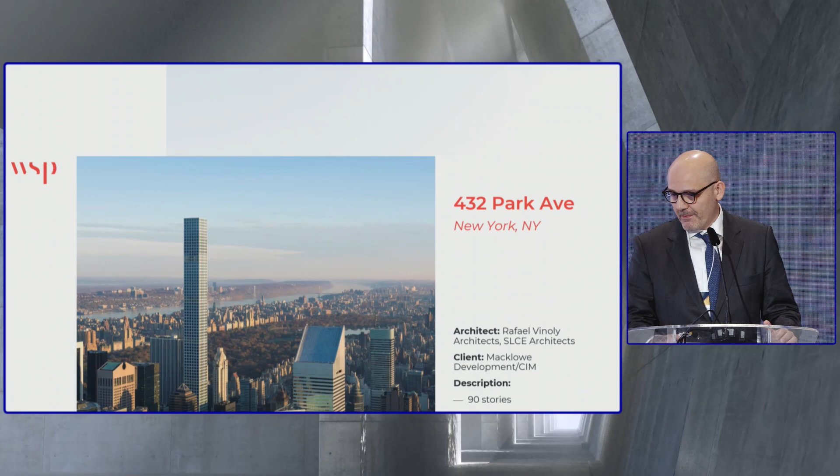So we have a lot of residential and commercial buildings. Starting with the New York area, we are the structural engineers of 432 Park. 432 Park is Rafael Viñoly's building. The architect is Rafael Viñoly. Our client, the developer, is Macklowe Development. It's a 90-story, roughly 425-meter tall building.

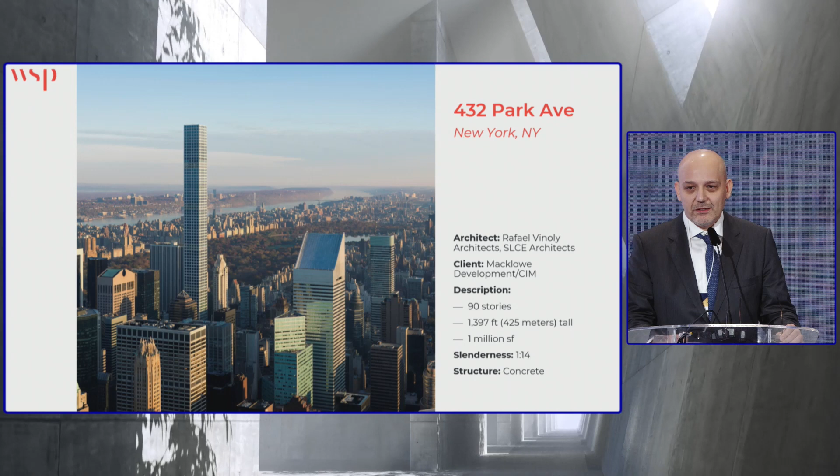An important thing is the slenderness ratio, which is 1:14. Another project of ours is Beekman Tower, Frank Gehry's building - I think Frank Gehry's only tall tower so far. It's a 1:10 slenderness ratio with a 265 meter height.

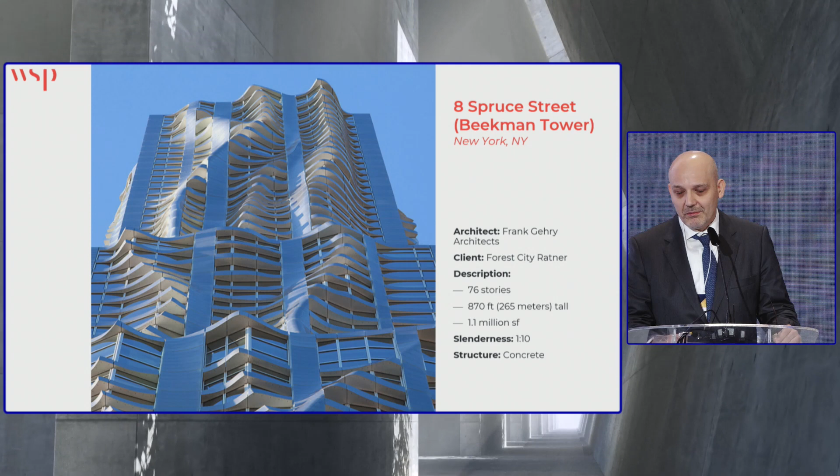Then we come to 157 West 57th building. This is the first building that we have worked on in the 57th Street line, also known as Billionaires Row. This is one street below Central Park South, so this row has a lot of tall buildings facing Central Park, which is a premium area. 157 West 57 is 75 stories and 1,000 feet, roughly 300 meters tall, and it's the first installment of the Billionaires Row buildings.

Another prominent building by Columbus Circle is the Time Warner Center. I wanted to show you this because this building still has concrete stems. It is a mall, a hotel, and also has residential floors, so there are 4 different uses of the building. It's 230 meters tall and was completed around 2002.

Another of our buildings, the latest installment in the 57th Street line, is 111 West 57th Street. It's 434 meters tall, and as of today it's the tallest, most slender building in the world. It's finished, it's occupied - people have been living there for a while now. This is the latest installment we've had a chance to finish on 57th Street.

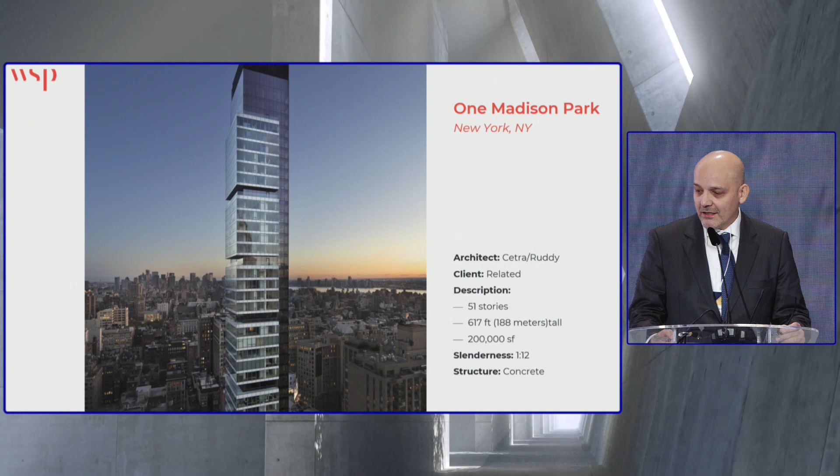We have another building I would like to show. This is the first real slender building that we have worked on. It's One Madison Park. It's been in use close to 15 years now. Our client is Related and the architect is Cetra/Ruddy. It's 190 meters tall.

One of our buildings is the product - this is finally finished, it's 217 West 57th Street. As of today it's the tallest residential tower in the Western Hemisphere. They've started selling apartments, and the triplex is for sale for $250 million. So it's a very successful project, and we're very happy and proud of working on it.

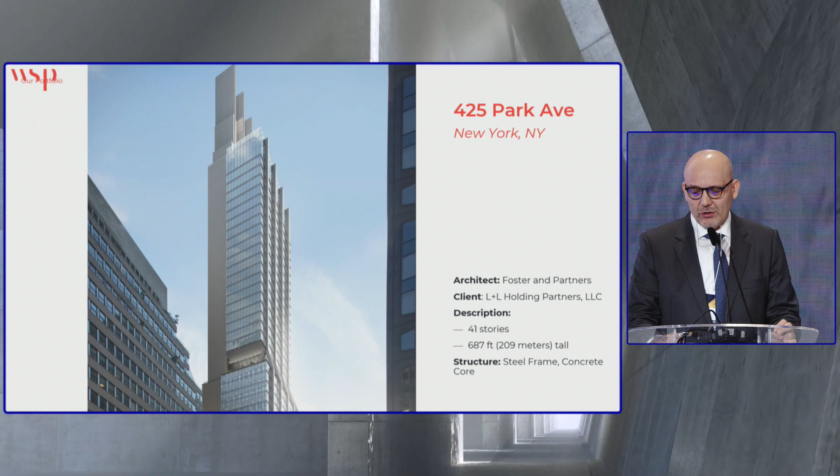This is the last one I want to show you: 425 Park Avenue. This is an office tower, recently finished a year ago. It's Norman Foster's latest office building.

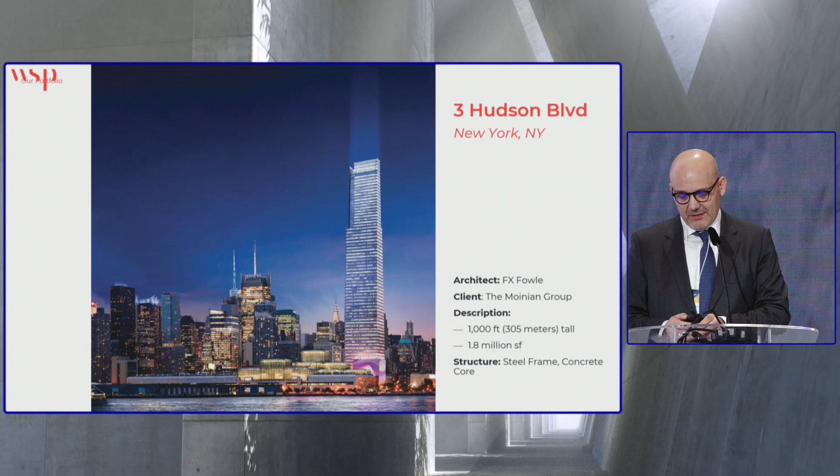This is 3 Hudson, one of the buildings we engineered in the Hudson Yards complex. Basically, this building sits on a train yard, a train parking yard. We have 8 buildings there right now, as of today, and all these buildings sit on the train yard, so there's a platform. We engineer the platform, and we engineer the buildings above them. This building is starting soon, but the rest of the buildings are already in place.

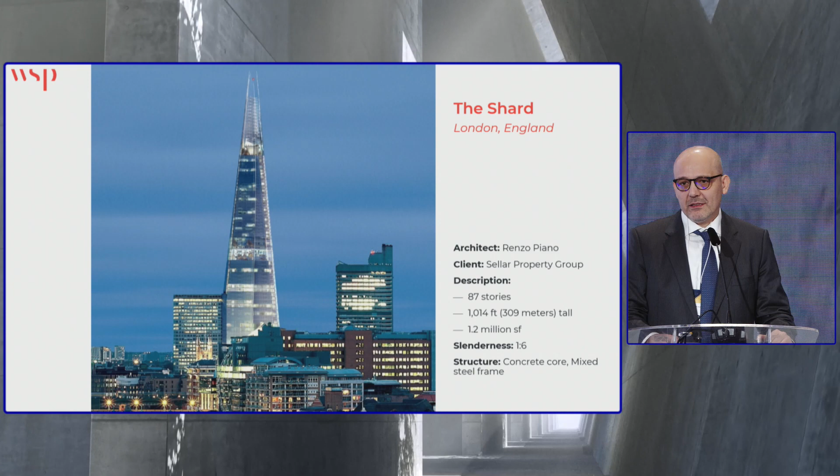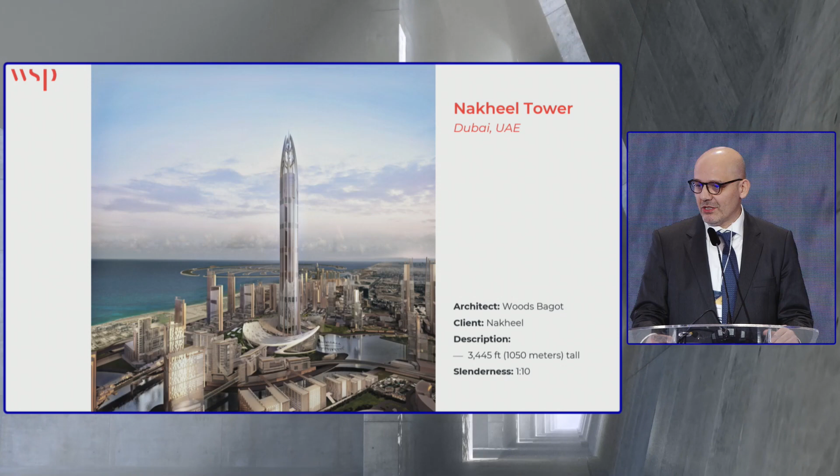So we also engineer high-rise buildings internationally. Shard is one of them. I'll pass through these buildings a little bit faster. We also engineered Nakheel Tower. Some of the projects, although they're engineered and have some level of structure in it, only have a foundation in place, like the one I will show in India.

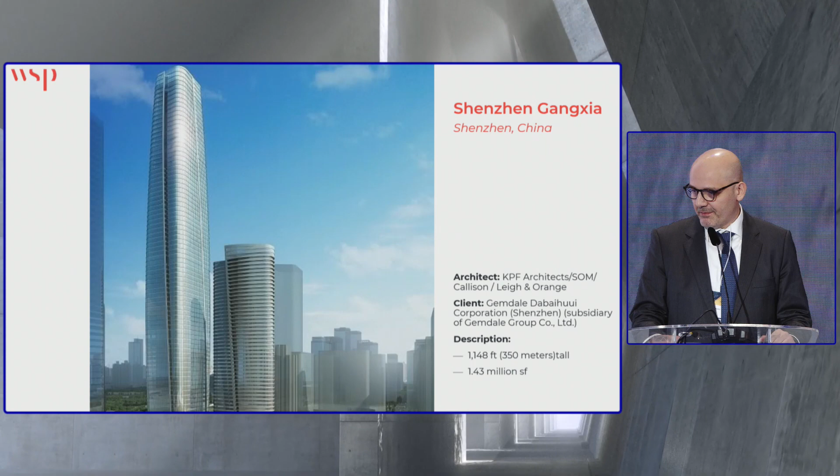So we also have a few buildings in China. This is a building that we extensively engineered for a number of years, and only the foundation level has been built. This is under construction right now.

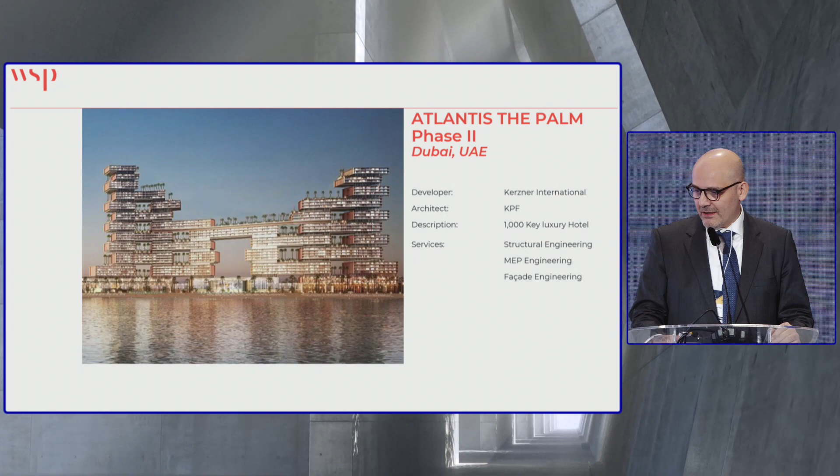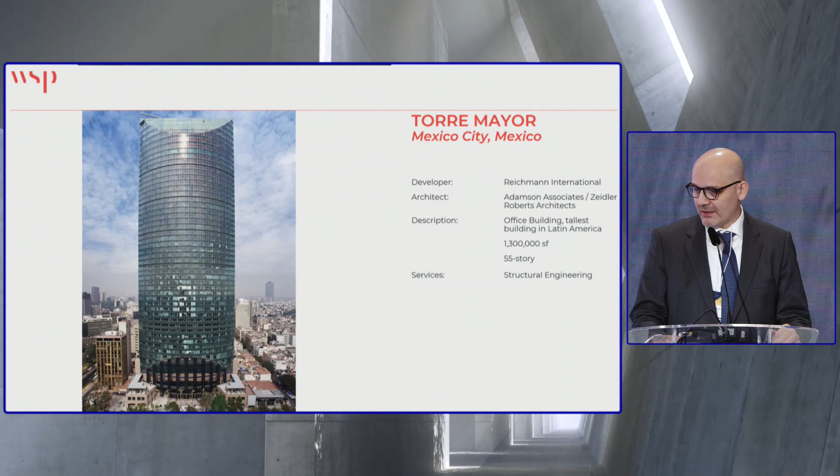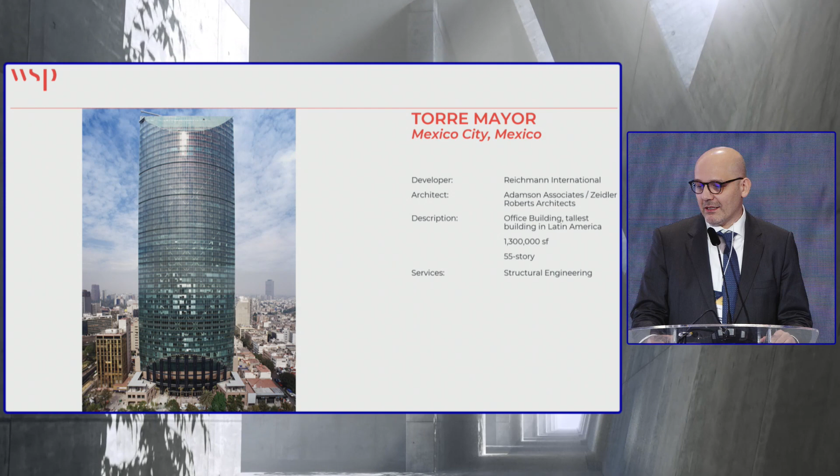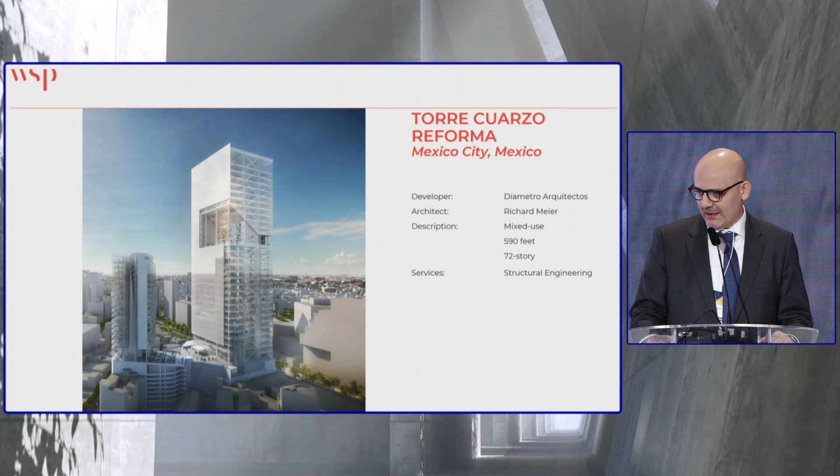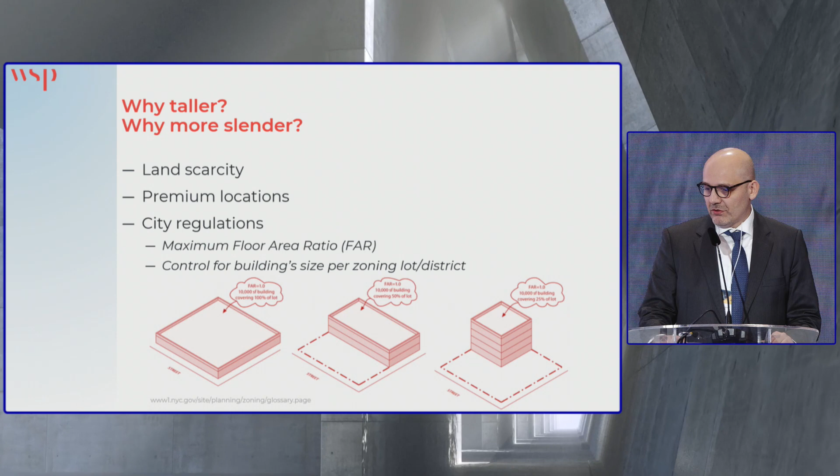So why taller, why more slender? The biggest thing is land scarcity. The location of these projects are mostly in premium locations, and some city regulations with zoning don't allow you to build more than a certain floor. Although there are some restrictions, in places like New York you can buy your neighbor's air rights, meaning you can buy your neighbor's right to build height, combine them, and add it to your building.

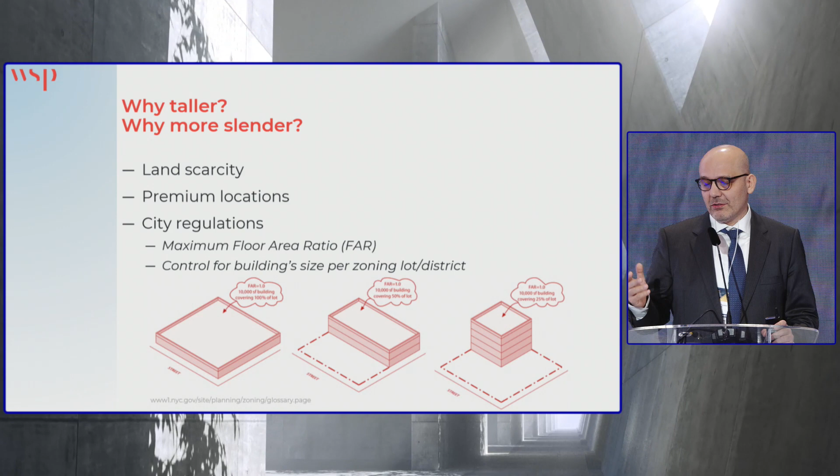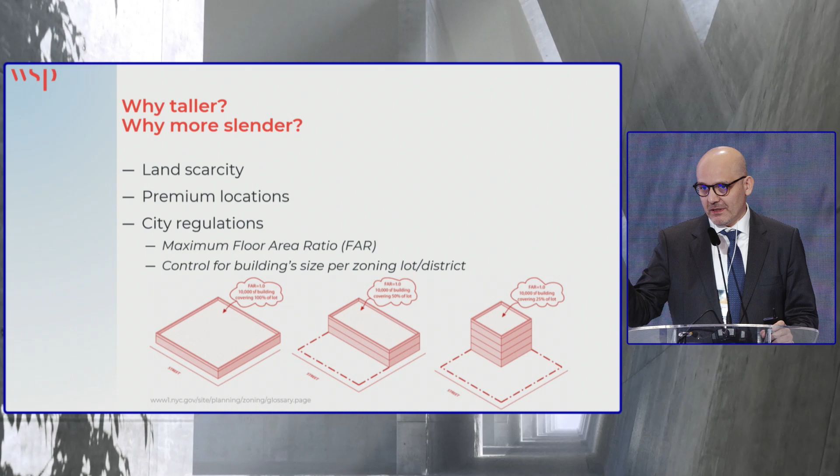Majority of these buildings are built that way, and this results in cantilever buildings like 217 West 57th Street, which means they bought the air rights of the next building so they can cantilever on top of it. The cantilever is almost 30 feet, or 10 meters. A cantilever for a tall building is a significant number.

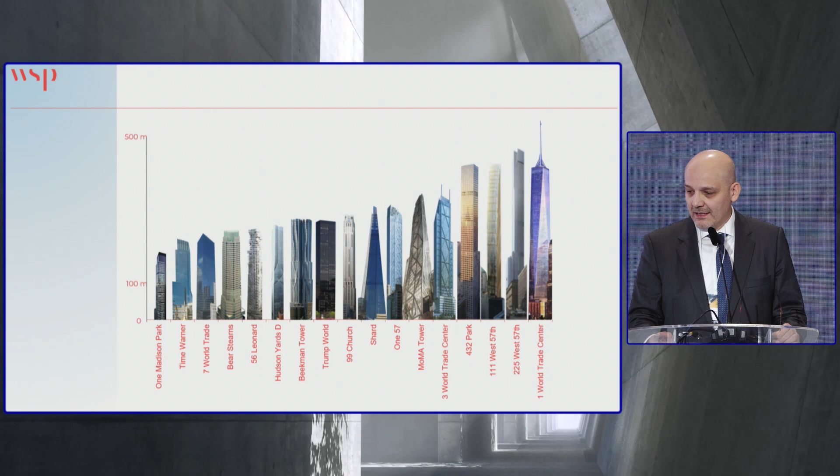So what is slenderness ratio? This is a very important topic. There are codes and documents that define this. Like in New York City, the slenderness ratio of the building is defined by 1 to 7. If the slenderness ratio in each direction is more than 1 to 7, the code requires you to take additional steps with the engineering, and it also has some mechanical requirements. So what we understand today is, since we have a lot of buildings that are very slender, we generally call a building around 1 to 10 slenderness a slender building, and super slender is larger than 1 to 12.

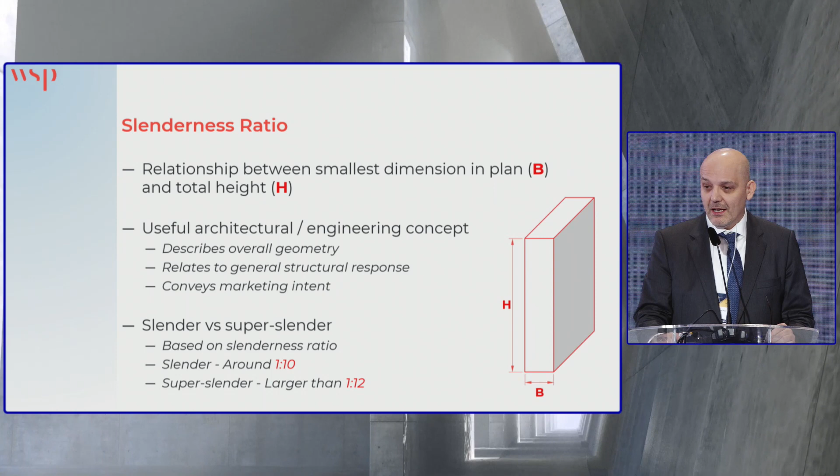As of today, we have a 1 to 24 slenderness building that's been engineered, built, and occupied, but we have a few other buildings that we've engineered that are not built yet. So it's just a small concept. We got this information slide from the Skyscraper Museum in New York, just to give people an idea of what slenderness means.

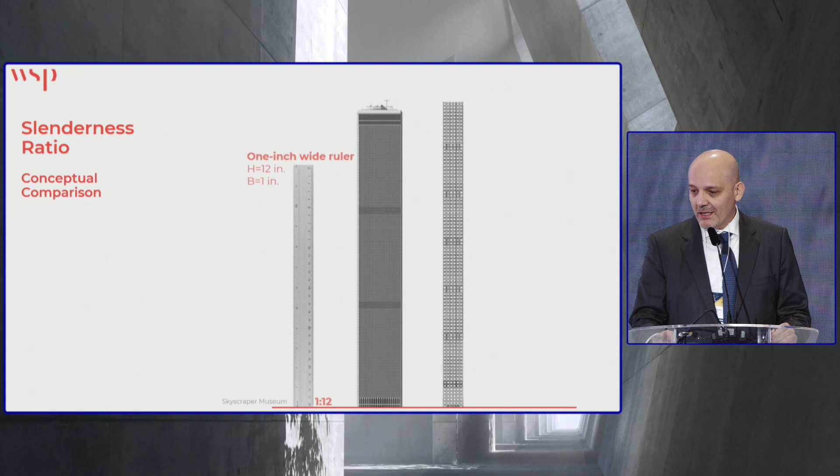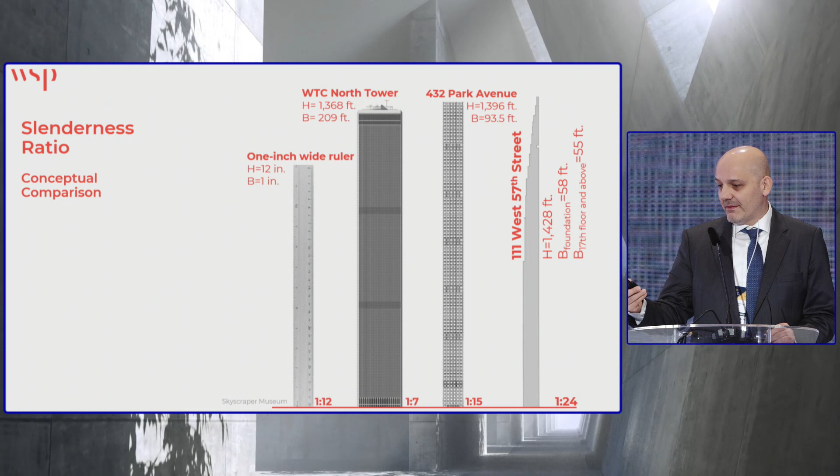So basically, a typical ruler is 1 to 12. You see the original World Trade Center is 1 to 7. And 432 Park is 1 to 15. Then we have 111 West 57th Street, which is 1 to 24. It didn't fit, so we kind of had to show it this way.

So there's another slide that shows the height and slenderness ratios. Slenderness ratios are very important because they change the behavior of the building significantly. And this is one of the aspects that we look at in our buildings. Not only how tall it is and where it is and other considerations, we especially look at how slender the building is.

There are certain things that increase when the building is slender, even at the same location and same height compared to another building. And these issues have to be addressed early in the process of engineering.

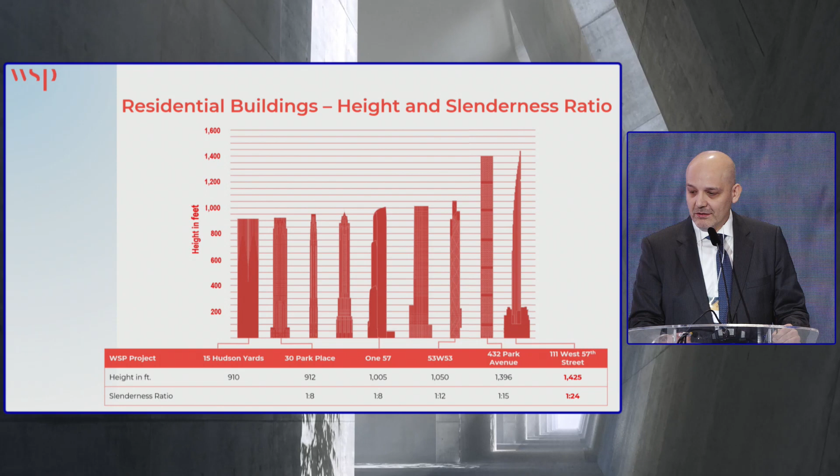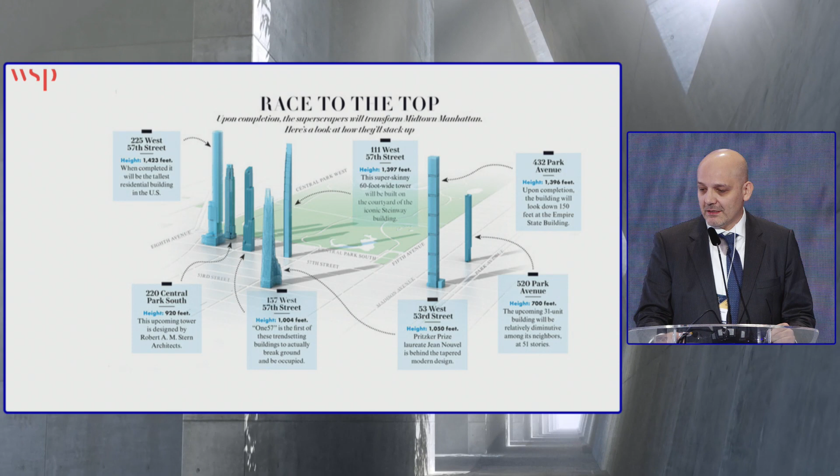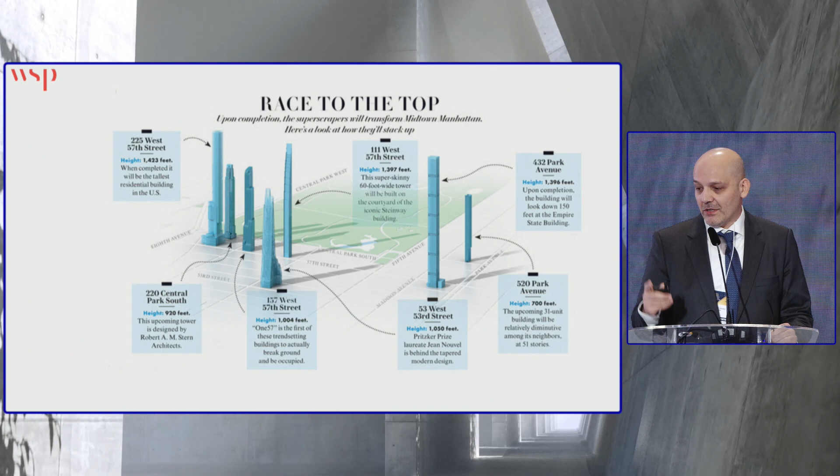And there's another slide showing our buildings. This is a document from one of the magazines in 2014. At that time, everything was under consideration, under planning, it was on the sketchbooks. Architects and developers were discussing this, and we start engineering all these buildings. This is 57th Street, where we call the Billionaires Row, and in that area, this is the most expensive real estate because of the view of Central Park. As of today, all these structures are built.

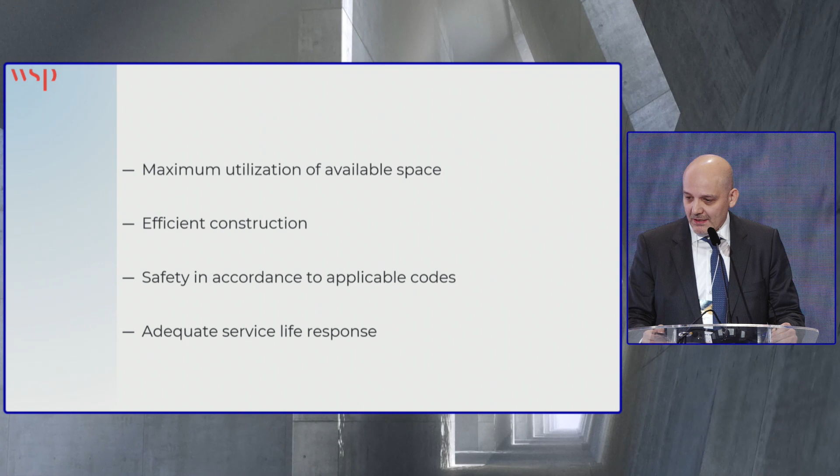So what we look at when we design a structure, we look at it with the architects and the owners, and we try to maximize the utilization of the available space. What it means is we try to let the owner increase the sellable area. We try to get a good product, and we are part of the team with the architects and the developers. So our first goal is having a successful product.

We try to do efficient construction. What it means is labor, in the markets we work in, is very expensive and hard to work with. It's in the middle of the city, and it's a very touristic area. It's not an easy thing to even transport anything. And there are some local regulations, like you cannot pick up any formwork with a crane above the street. So there are some other restrictions local to certain markets.

What we design is efficient construction, and it allows us, for any of these buildings you see in the presentation, to build every floor in 2 to 3 days. Even though the structure is hard or complex, because no two structures are the same, we have been doing this for over 20 years in our projects. Obviously, doing a 30-story building with a 2-day cycle per floor is different than doing a structure of 1,000 feet, or say 100, 120-story high buildings. But we achieved that, and we are very happy with the results.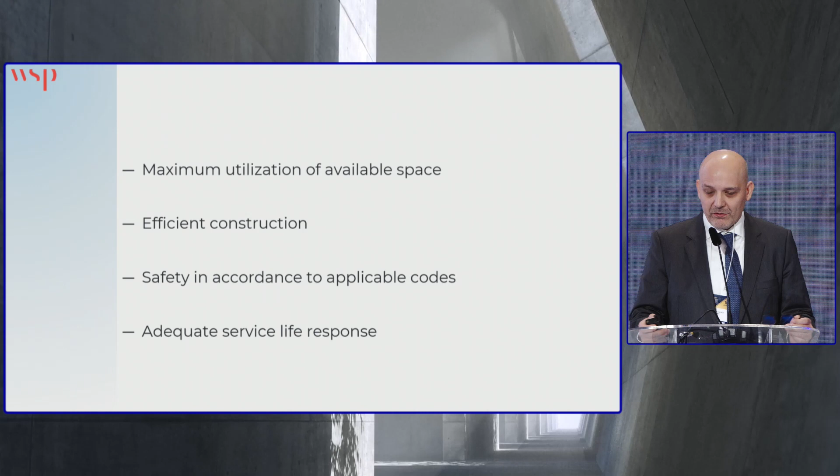And also, we look at some other service life conditions. What it means is we look at deflections. Also, very special to tall towers and residential and office towers, we look at accelerations on the buildings, which is a comfort criteria. Some of our designs are basically governed by accelerations too.

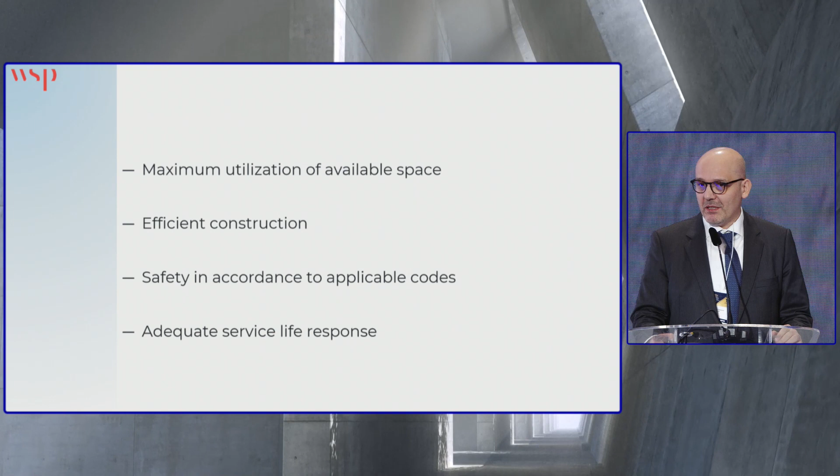So every project has a different geometry, different architect, different characters. So we address every structure in a different way. I want to show a few of our projects. It's not basically a rectangle or a square. It's different challenging projects with the architectural view and architectural intent, also with the developer's final product.

So this is one of our proud projects. It's MoMA Tower, 53 West 53rd Street. It's 1,000 feet, almost 320 meters tall. It's 82 stories. The special thing about this project is the core is eccentric to the building. So there's no central core. The core is on the eccentric side, which you have no view. So the core is looking to the south.

North is looking to the Central Park. Every floor, the north and south is sloping. So what it means is every floor you have to slope every column. Also, we have a concrete diagrid system.

So, let me go back. Okay, so we have a concrete diagrid system. When we first start the project, as we always do, we meet with the owner and the architects. When you're looking at the first phase, there are a lot of concrete connections in there. So we discussed having a steel structure, concrete core steel structure, but steel was expensive at the time of the construction, the development. So they decided to go with concrete.

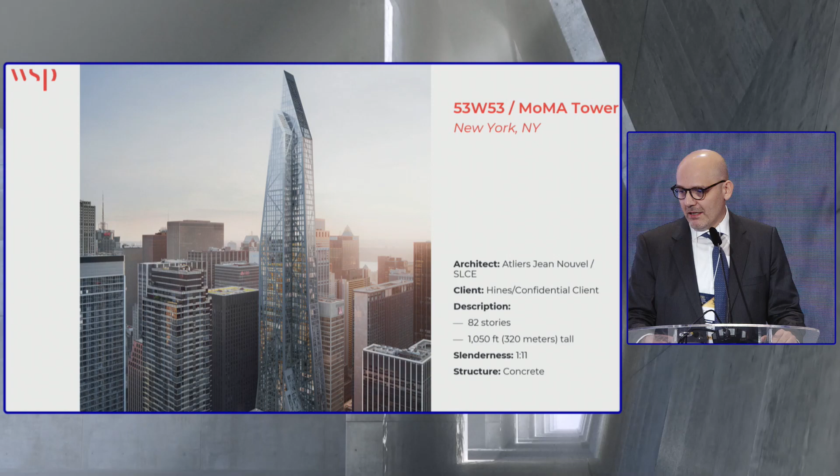It was a pure monetary decision, because as engineers, we try to address the connection details with the diagrids. We don't want to make the building more complicated than it is, but the decision was made, and this is the full concrete structure, as you see, with the diagrids, with the floor core, and the sloping columns.

There's another one, another geometrically challenged project. It's 56 Leonard. Also, I repeat, it's a Jenga building because none of the two floors are the same at the top of the building. There are a lot of cantilevers, there are a lot of Vierendeel trusses in there. The owner again insisted on having everything in concrete, and we provided a concrete structure.

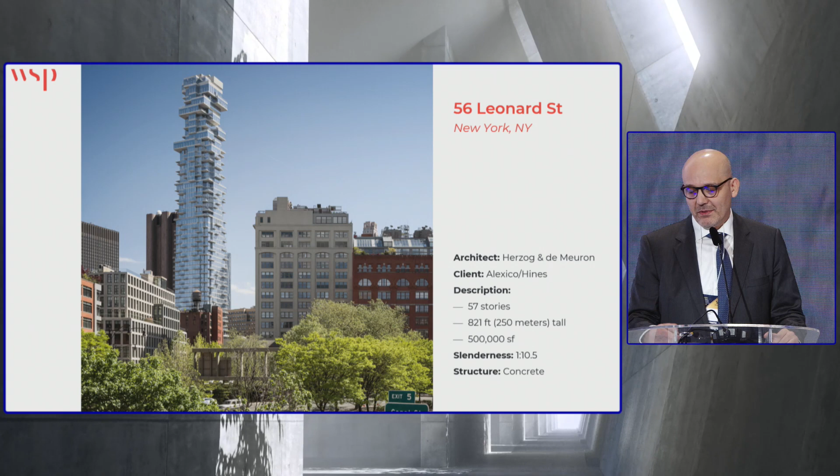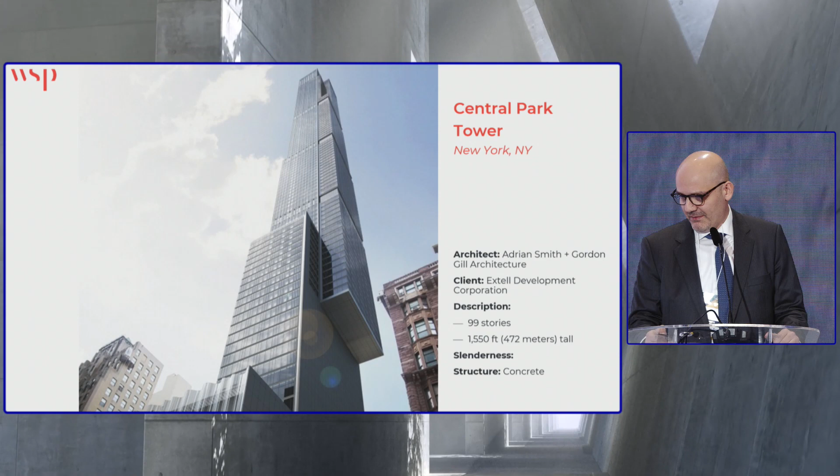217 West 57th Street, we have, I mentioned before, we have a 30 feet cantilever here on the existing top of a building. This is what I wanted to show before.

This is American Copper buildings on the east side of New York. In this one, we have a bridge that is not a passing bridge - it's an amenity space. So it's a three-story structure. It has a pool, it has a gym, it has a common area.

The owner wanted to have one amenity area for two buildings instead of two separate amenities, to save money. And this is the solution that we came up with. So the bridge that you see today is cantilevering from one structure and on rollers on the other structure.

This is when it was under construction. So this building is sloping along the long side, and this building sloping on the narrow side by design. So we have a lot of calls on the construction. When I was on construction, people saw that building doesn't have a straight shape, so they called the building department saying something's wrong with the building.

So we had a lot of stop orders to just make sure that nothing is out of control. But this is by design - this is just the architect's view. In this building, it's very interesting because this portion is steel. In this building, we achieved in both towers a 2-day cycle, although everything was shifting every day.

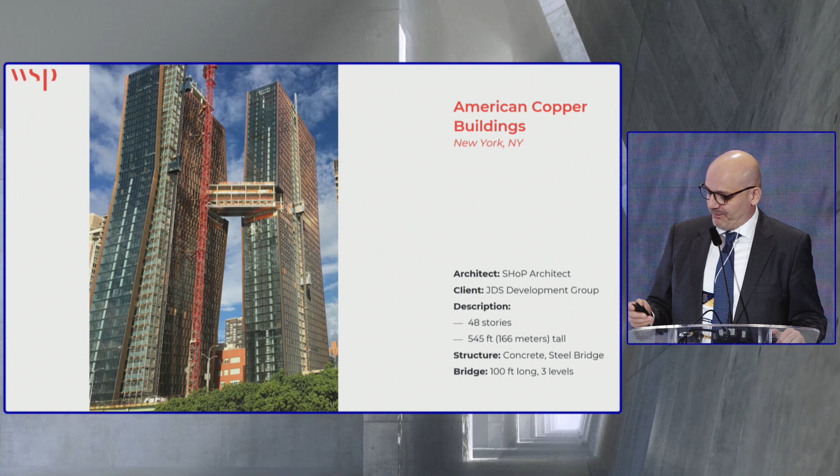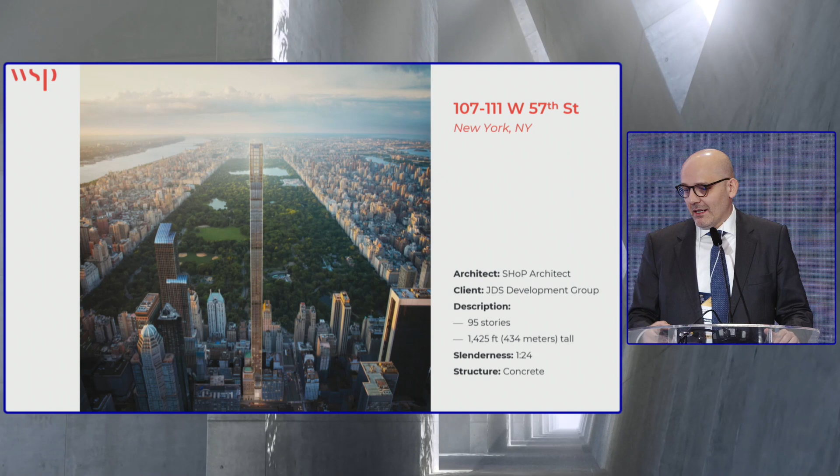111 West 57th Street - this is one of the most challenging buildings because the space is very tight. Basically the width of it is, if you see in the movies, you have townhouses in New York - the width of this structure is basically 2 townhouses, it's not more than that. And it also sits on the Steinway building on 57th Street. So it's not only a brand new tower, it was also rehabilitation of the existing Steinway building, and we have to go through the existing Steinway building, which was built I think in the 1920s, yeah.

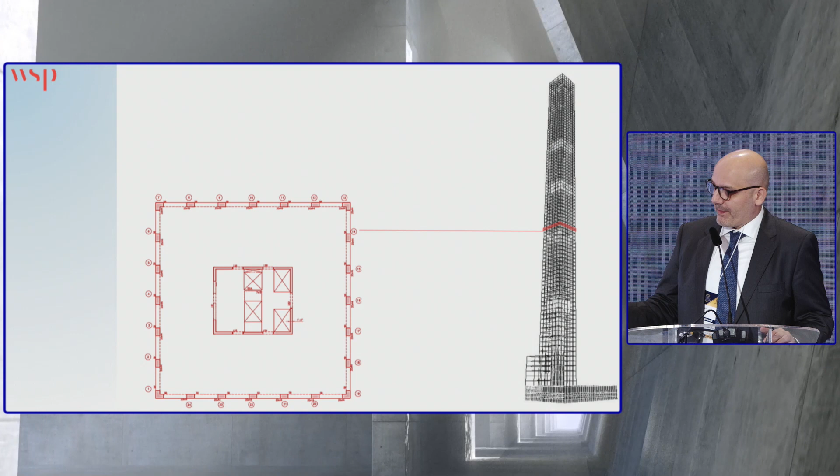This is one of the objectives I was telling you about. What we try to do is have a simple structure. Simple structure means no interior columns. We have a perimeter structure that works with the core, and no interior columns on this project. This is a floor plan for 432 Park.

This is one of our analysis models for deflections. This is basically the main structure. You see there's a core, there's a perimeter moment frame every floor. Also, the columns on this project are exposed and have a color, white, exposed concrete, and it's 1,400 feet tall.

New York's weather and temperature change very significantly. So what it means is you have to adjust your structure, design it also for temperature load. This temperature change is defined in the code, but sometimes it becomes like 60 Fahrenheit, which is a big number.

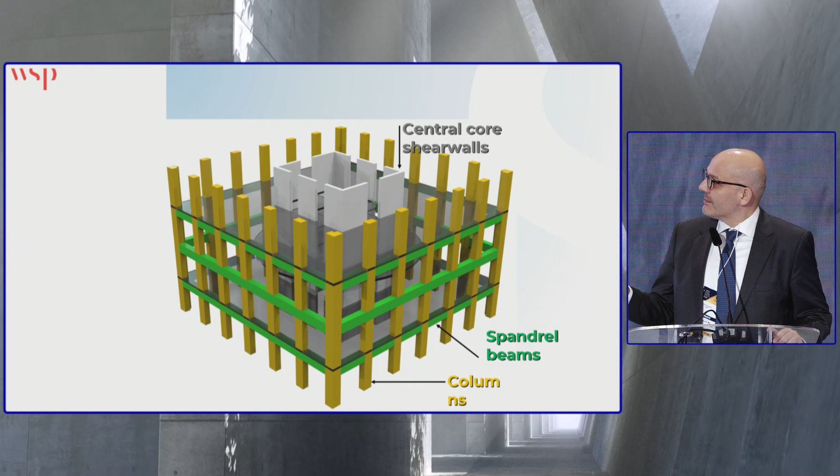This is a floor plan for MoMA Tower. Let me go back. So the core is here. The core is eccentric, and the north side of the building and south side slope throughout the building. North side faces Central Park, and south faces downtown. In this building, as you see, there are no interior columns throughout.

And these are basically diagrams. They show you diagrams of these columns, but they're diagrams.

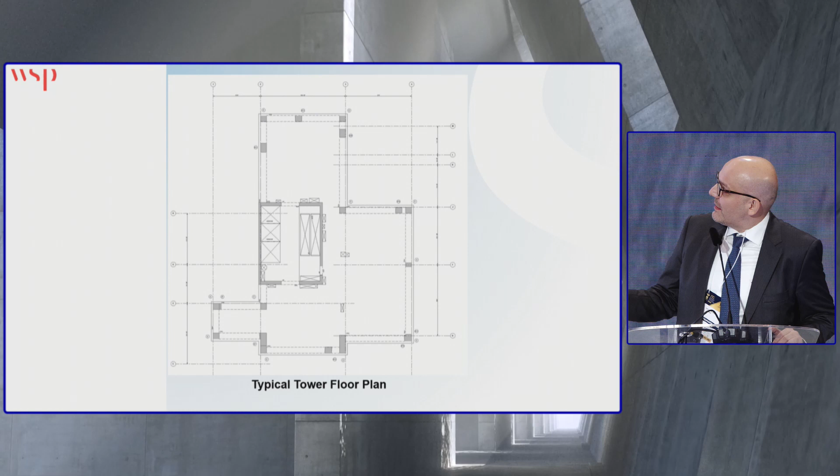With our design strategy, we look at making sure the building is safe. We have a load path, and these are all clearly defined at the start of the project. We carefully model everything and analyze it extensively. We understand these are very important when starting a successful project. If you don't know what sizes you'll have, or if it's not constructible, these are very important items that have to be decided and agreed upon, because there's a product at the end of the day, and there's a monetary portion to this discussion.

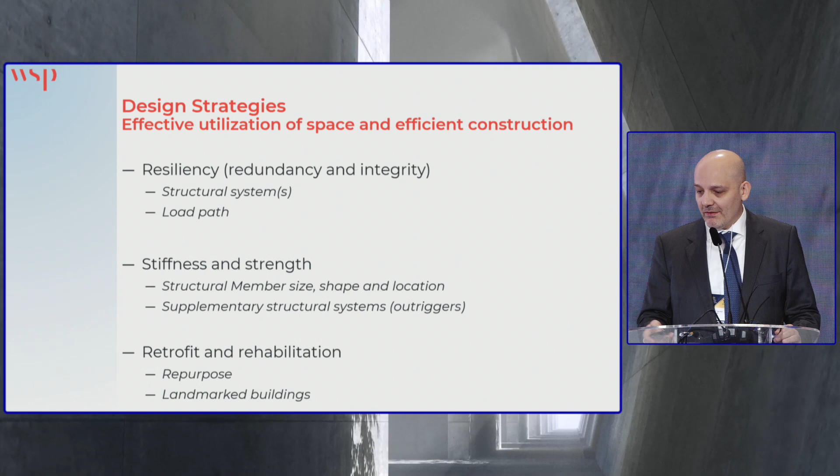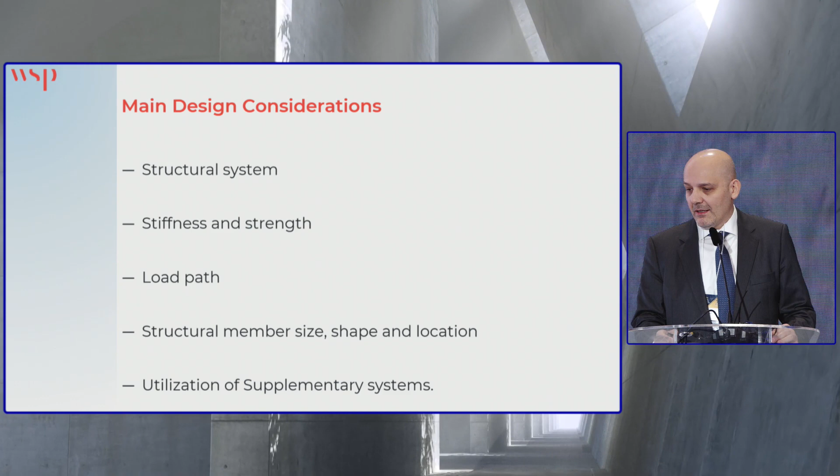As we did in Steinway Tower, we also have retrofit and rehabilitation. So we look at the structural system, the stiffness and strength of the building, load path, we size the members, and whenever needed, we entertain the idea of additional systems like a damper for comfort, or any other geometry changes that we advise the client to do. Sometimes architects are happy to entertain this, sometimes they don't, but these are the items we bring up to the table.

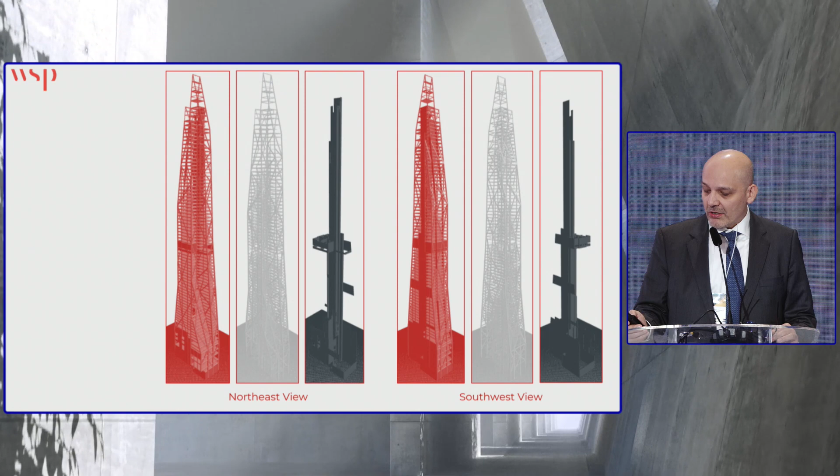Simplicity is one of the most important items. This is basically the structure you see in the MoMA Tower. This is the core, let me go back. So this is the main core, and we have an external diagrid system. Our core is eccentric.

We have an outrigger floor here, which is also a mechanical floor, to control the deflections and reduce some sizes. Also, interior, it's very important to have a certain core size because of the sellable area.

Since the core is eccentric, we also pay special attention to creep and shrinkage. As I say, when you have a small building, this may not be a huge issue, and existing practices can address it, but when you have very slender, very tall buildings, you have to address these issues, or otherwise a lot of problems arise. You may end up with sloped floors instead of level floors.

This has to be fixed. It may increase the slab thickness because of how much material you put in there to level it. There are also a lot of lawsuits because of how much energy and labor is added to put materials in after construction finishes. So on all our projects, we do a creep and shrinkage analysis, axial shortening, and issue a table to correct the slab when they build the structure.

So this is a view from the top. This is an outrigger floor where, if you look, we connect outside and have deep beams with openings in them, allowing the mechanical ducts to pass through each other whenever required. But the main idea is connecting the core to the outside diagrid to control the building's deflection and also to stiffen up the building.